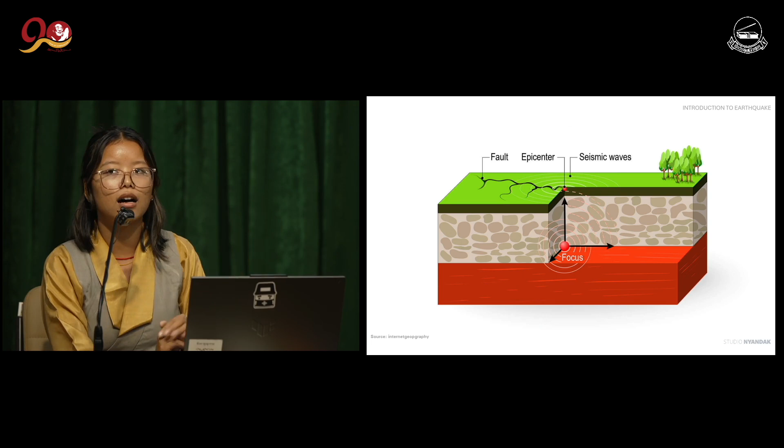These tectonic plates move with each other at different speeds and in different directions. On the diagram, there is a focus point within the Earth's surface, which creates a seismic wave that reaches the Earth's surface, and directly above that point is the epicenter. The focus is where the seismic waves originate.

So just like I said, the tectonic plates move with each other. And when they move with each other, they build up stress and strain. These energies get stored up, and the sudden release of this energy creates seismic waves, which we term earthquake in usual life. Scientists and geological experts use tools like seismographs to scale and measure the seismic waves, and then determine the intensity and magnitude of the earthquake.

Moving forward, there is this Indian plate in the south and Eurasian plate in the north. So what happened was 50 million years ago, there was a collision between the Indian plate and the Eurasian plate. The Indian plate moved northwards to the Eurasian plate, under-thrusting into it, and created this seismic belt, the Himalayan arc. The Himalayan arc, as you see, is this orange line, and it extends from northwest Kashmir to northeast Arunachal Pradesh.

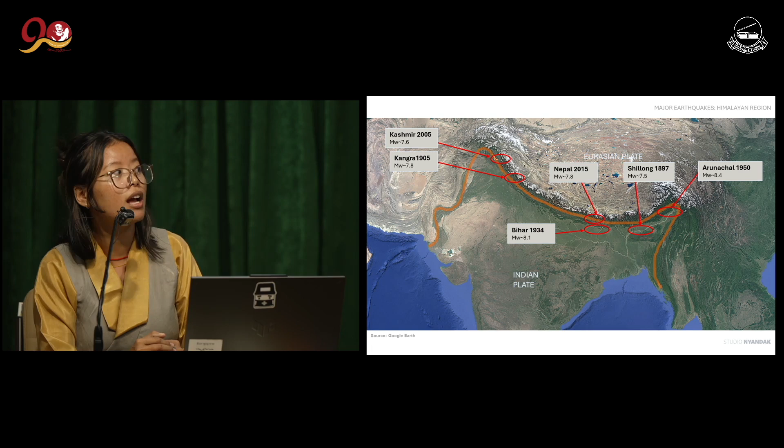This is the earthquake hazard map that shows the seismic zoning as per the Bureau of Indian Standards. It is overlaid with the seismic activities of magnitude more than 5. The circular dots you see are all the seismic activities above magnitude 5. The table on the right upper corner shows the zoning classification according to recorded seismic activity over the years. The Himalaya region, as I mentioned, is the most active region when it comes to seismic activity.

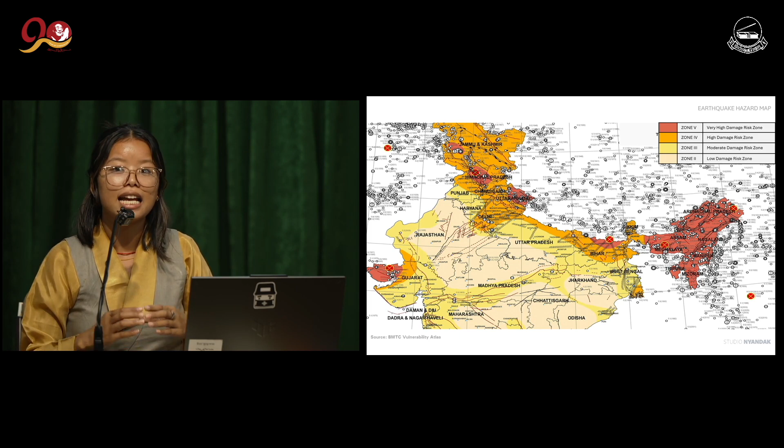Himachal Pradesh, on the northwest side, lies in both zone 4 and zone 5. Around 98% of Kangra district in Himachal Pradesh lies in zone 5. The red color you see on the Himachal Pradesh map is where Kangra lies. Therefore, we need to pay special attention to the buildings, making sure they follow seismic design standards, and assess existing buildings for earthquake resilience so as to be safe.

Focusing on Himachal Pradesh state itself, I will be talking about the major thrusts and the geology of the state. We have the MFT, MBT, main boundary thrust, and MCT. These three are the major thrusts along the length of the Himalayan arc. If you see the color coding, these major thrusts divide the geological zones into 4 parts: Siwalik ranges, Lesser Himalaya, Great Himalaya, and the Tethys domain.

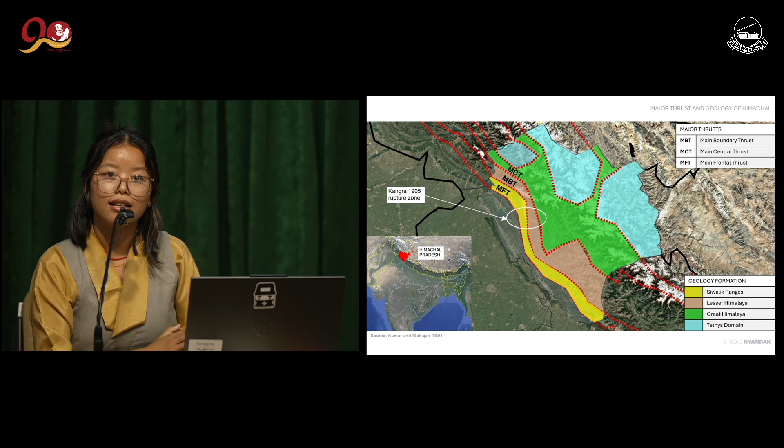The Kangra, Dharamsala area itself lies in the Lesser Himalaya region. This means the Lesser Himalaya region contains Dagshai and Kasauli formations. In simple terms, it contains mudstones and sandstones, and the area primarily consists of alfisols, a sub-mountain soil, layered with shale and siltstone. These soils are rich in clay content, overall suggesting a strong bedrock but weak surface deposits of the area, which additionally factors in amplifying the hazard risks.

Here we have a slide which shows the most severe earthquakes in Himachal Pradesh recorded by the State Disaster Management. The table shows when and where the earthquake happened, along with the magnitudes, and the damages or casualties it resulted in. The first row shows the most devastating earthquake recorded in the 20th century.

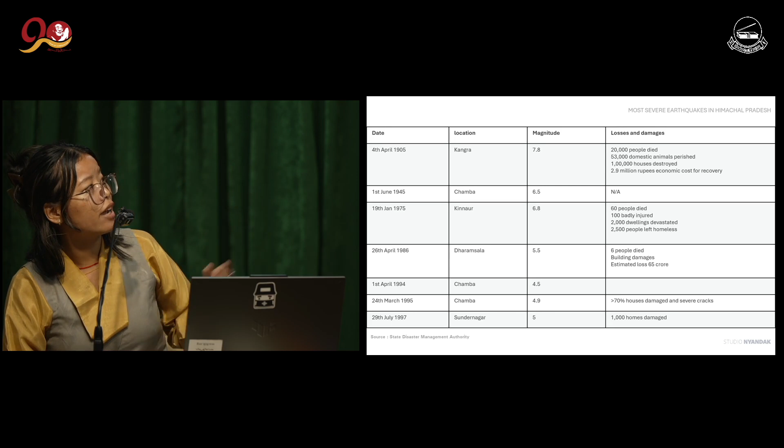1905, 4th April, it occurred in Kangra at 7.8 magnitude, which resulted in around 20,000 people losing their life and more than 1 lakh homes getting destroyed.

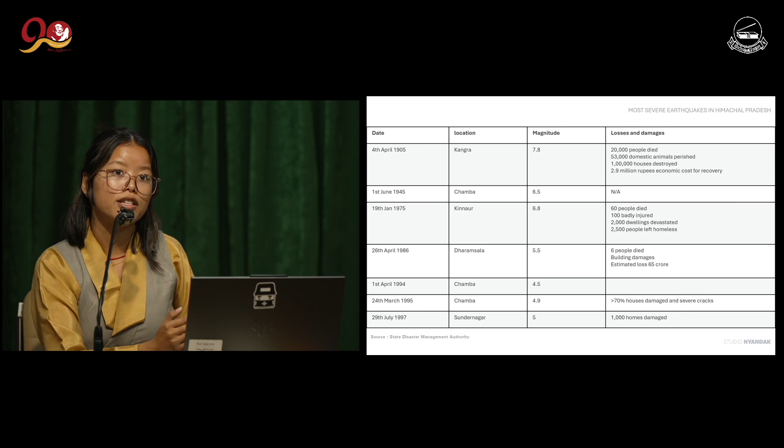And then we have following rows with moderate seismic activities. But if I were to focus more on the Dharamsala area, we have the 1986 earthquake that happened with a magnitude of 5.5. If you see the difference, you can observe that the less magnitude it hits, the less casualties we observe.

These are the pictures taken by C.S. Middlemiss, who came to Dharamsala after the 1905 Kangra hit. While investigating, she took those pictures, and I retrieved those pictures from her investigation book.

On the left side, the old British barracks and the church, the walls are partially collapsed. On the right side, the bazaar and the McLeod Ganj market are totally collapsed. These buildings were mainly built with unburned bricks and mud blocks.

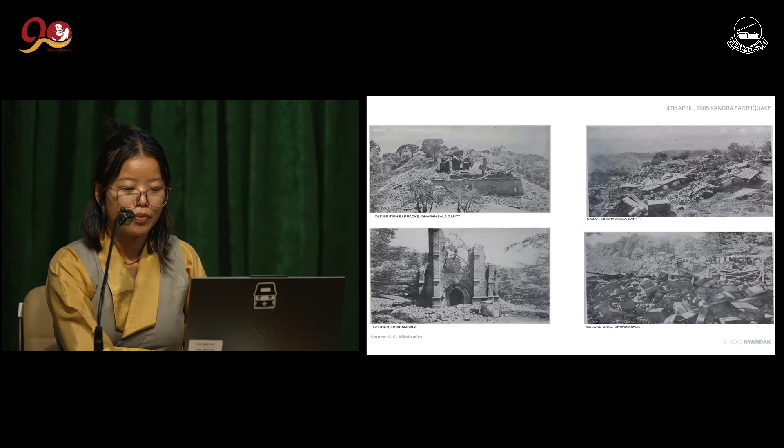We can still find housing similar to those in the Dharamsala area, especially in the village areas, and it makes the people residing there vulnerable to the hazard.

So we have this slide which shows the perspective view of the Dharamsala area. Looking from satellite imagery, Dharamsala is a name given to several settlements located above the Kangra Valley. This area is growing rapidly in terms of population as well as construction, and we all observe how rapid the construction and housing are getting built.

As per the Department of Town and Country Planning, they have recorded a 2011 census of total population around 92,000, and they have estimated a 2035 projection of over 2 lakh people, thus increasing the amplification of hazard with more buildings getting destroyed and more people losing their lives.

Hence, a controlled planning and building construction should be followed according to the seismic standards to reduce the hazard impact.

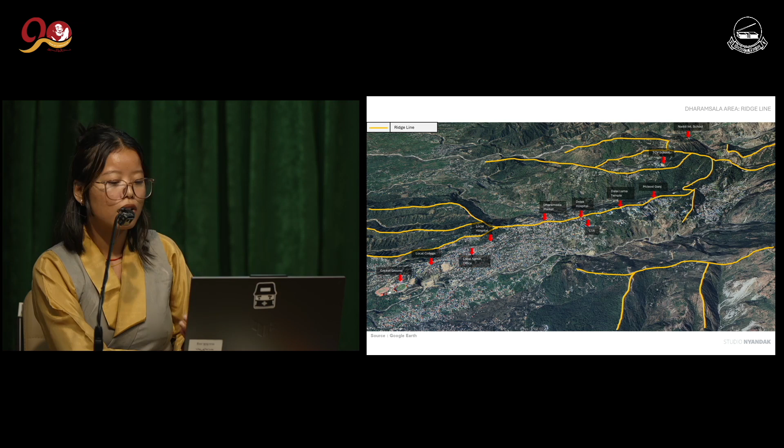Steep slopes are also very prone to landslides, which occur during slope failure in monsoon, and most importantly, post-high intensity earthquake hazard. Thus, construction on the steep slope is not recommended.

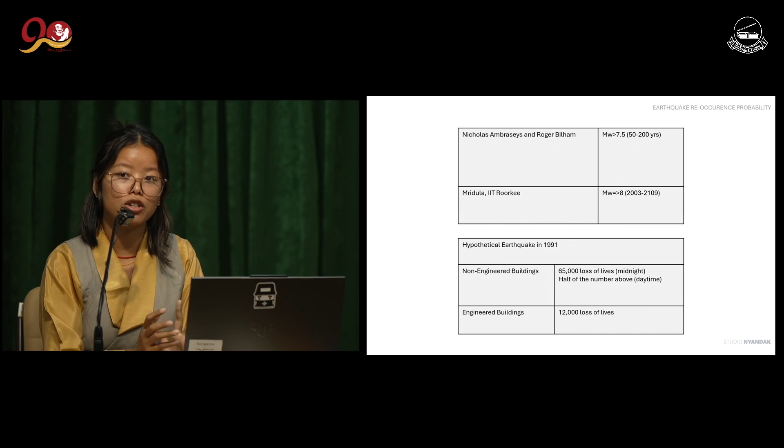Lastly, I would like to conclude my presentation with this slide, which includes the recurrence probability of earthquake in the Dharamsala area. As you can see on the top table, there were geological studies and seismic analysis done by geological experts and researchers. One of them are Nicholas and Roger, who have estimated that more than 7.5 magnitude of earthquake will occur in the time interval of between 50 to 200 years.

We also have Mridula from IIT Roorkee. Her research says that more or equal to 8 magnitude earthquake will happen during the time interval of 2003 to 2109. This shows an earthquake possibility as severe as the 1905 Kangra earthquake in the next 50 to 100 years, approximately. At the bottom, we have the hypothetical earthquake estimation.

This estimation is done by a former national seismic advisor, Professor A.S. Arya.

He estimated that if an earthquake similar to the 1905 Kangra earthquake were to happen in 1991, the casualties for non-engineered buildings, in the scenario when the earthquake hits in winter at midnight, would lead to around 65,000 people losing their lives, and half that number if it occurs in the daytime.

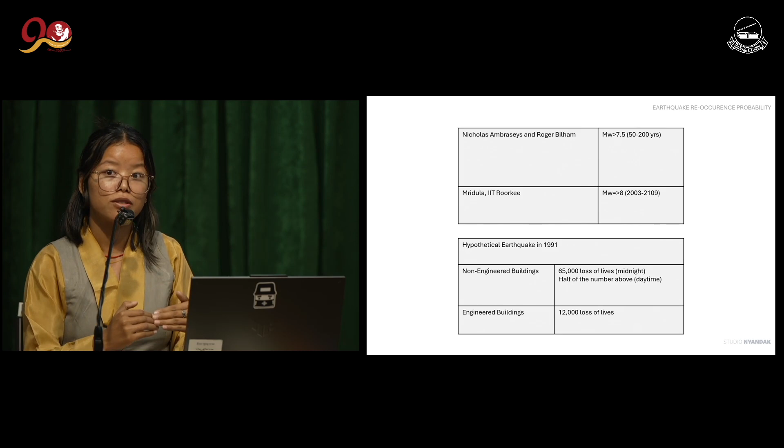But on the other hand, if the buildings are engineered buildings, the casualties and people losing their lives reduces to approximately 12,000. That shows a big difference between engineered buildings and non-engineered buildings.

The question of a Kangra-type earthquake is highly debated because even geologists cannot tell when it will occur. But it is on us to be prepared and aware, and sustainable development should be practiced to avoid the damages they leave behind. So let us be alert.

Thank you, Dechen. We can now explore how rapid visual screening and risk management, integrating them, will help with our community's earthquake preparedness. This is particularly crucial to Dharamsala, our region, given its high seismicity and building vulnerabilities. In my presentation, I will cover risk management strategies, rapid visual screening, and assessment methods.

These two terms on the screen are earthquake hazard and earthquake risk. These two terms are often misunderstood as the same thing, but earthquake hazard and earthquake risk actually have different meanings.

Earthquake hazard talks about the records of earthquakes, data on the geological setting of the region, and the ground shaking models of the region, whereas earthquake risk factors in the earthquake hazard data along with local soil conditions, the area of exposure of the region, and the building weakness of buildings.

To put it in simple terms, earthquake hazard is the prediction of earthquake based on past data, whereas earthquake risk talks about the potential damage of such earthquakes for the region.

Information regarding earthquake hazard is a prerequisite to defining earthquake risk, and that's what Dechen just explained to us all, the earthquake hazard of the Dharamsala region, so we have a better understanding of such earthquakes in this region. Understanding this hazard level is the first step in effective risk management.

Let us now discuss the risk of earthquakes. When an earthquake strikes, there are two major effects: the primary and the secondary effects. The primary effects are those direct effects as a result of the ground shaking, and the secondary effects are the consequences of those primary effects.

If I were to talk about the risk, in the photo you can see the primary risk. Ground shaking is the most common and widespread effect, causing structural damage through seismic waves — damage to buildings, infrastructure, roads, bridges, everything, which makes it harder for rescue operations, recovery, and connection between places.

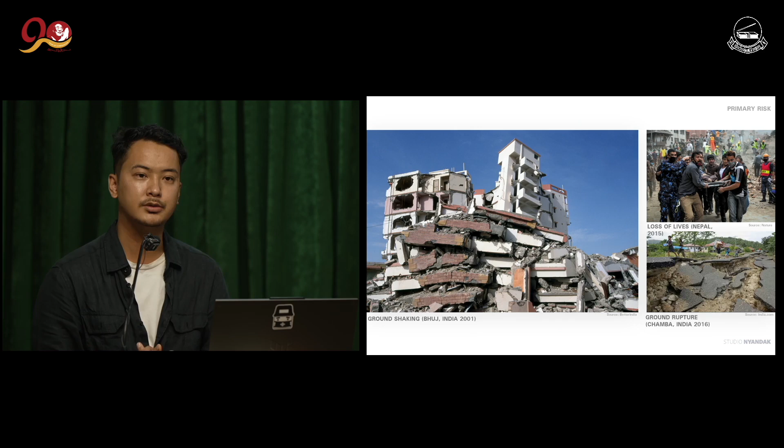What's important out of all the risks is the loss of lives. Buildings, infrastructure, and roads can be repaired, but loss of lives is irreparable, as we all know. There are other primary risks besides these, but they are of lesser concern to the region, such as tsunami and liquefaction, since we're up in the Himalayas, so tsunami is not much of a concern.

So the consequences of the primary risk lead to these secondary effects or risks. So landslides - Dharamsala, as we all know, is in mountainous terrain, so we're particularly vulnerable to earthquake-induced landslides. The photo on the right is of Shimla in 2024. Constructions done without proper geotech survey or engineered design can actually lead to premature landslides, as you can see in the photo.

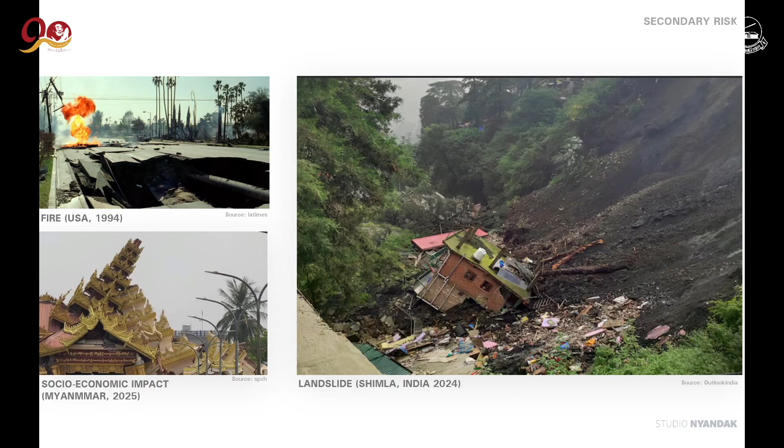And socioeconomic impact - earthquakes disrupt livelihoods, tourism, and local economy, which can lead to displacement, loss of information, and loss of actually cultural, authentic cultural information. For example, the Library of Tibetan Works and Archives that we're currently in has a lot of important Buddhist texts. Back in 2006, as Keshil Haktola mentioned yesterday, Geohazard International, a non-profit working towards global earthquake safety, came and visited the site with a lot of US engineers.

And they recommended that a lot of the books and shelves in the library building were not properly secured, so that could actually lead to the loss of such texts. So if there was an earthquake, even though the building is safe, the books and shelves could fall down and the text could get damaged or lost.

And to talk about fires - secondary fires from earthquakes are actually more devastating than the earthquake itself. The photo on the top left is of the 1994 earthquake in California, US. The fire you can see in the photo is actually from a gas main which caught behind a crater, catching fire and resulting in a lot of houses being burnt in that region.

And flooding is also a risk, which is not shown in the photo. It's quite doubtful in this region because we're up in the mountains, or the hills as we call it. But it could actually lead to flash floods, and rivers could change - the courses of the rivers could change. It could affect smaller regions.

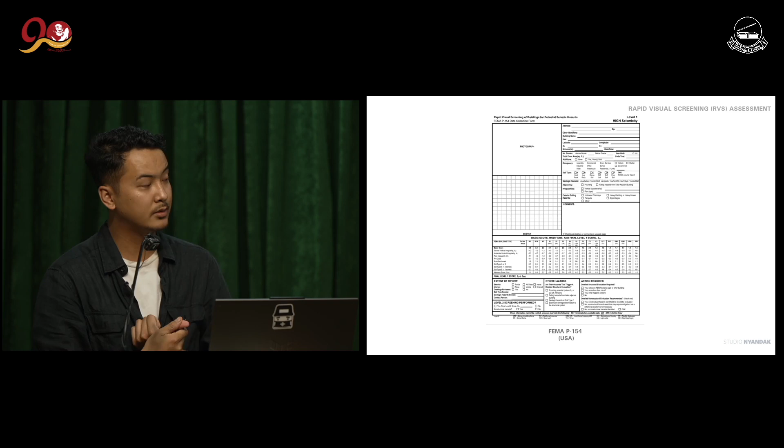And so building construction type is one of the key factors - it's a foundation for vulnerability scoring. And earthquake zones and soil conditions also significantly impact the vulnerability.

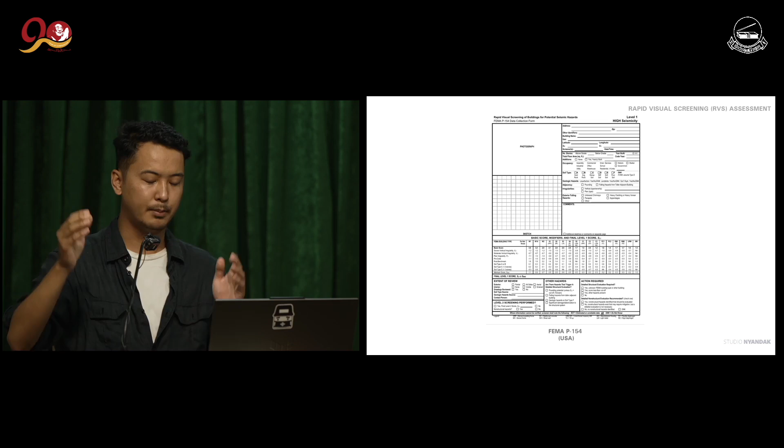If you look in the middle of the screen, where there's a bunch of numbers and tables, the first row is basically the building typology. Based on the building typology, you get a basic score given, whether it's a reinforced concrete or a wooden structure. Then you have score modifiers below, with a bunch of numbers you can see, which are then factored in based on the building parameters. And then an overall score is given.

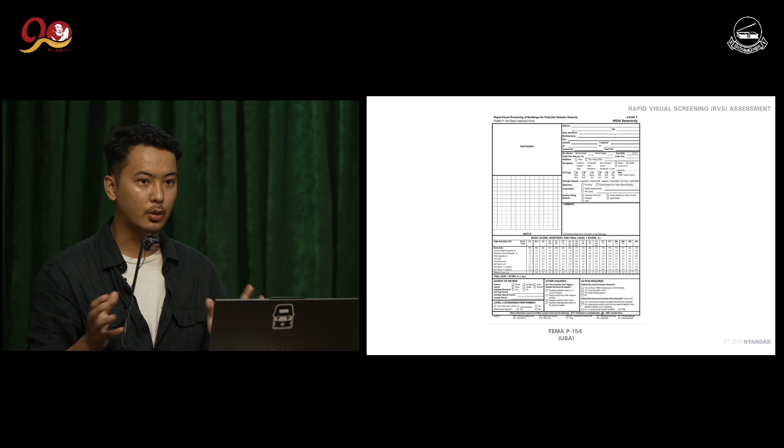And the FEMA P154 form was one of the first forms developed by the US in the 1980s, and the form has evolved into this form. This is, I think, the third iteration of this form.

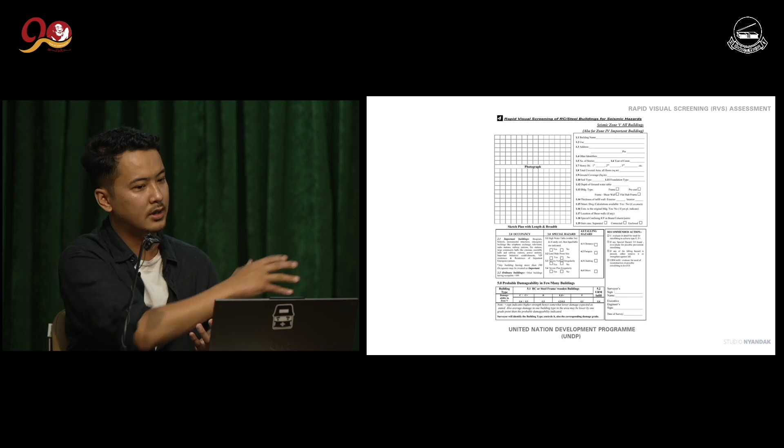And we have other rapid assessment methods in addition to the one developed by FEMA that you just saw earlier. So here are some examples. This one particularly is developed by UNDP, and it's actually developed for developing countries, designed to work with limited technical expertise and resources.

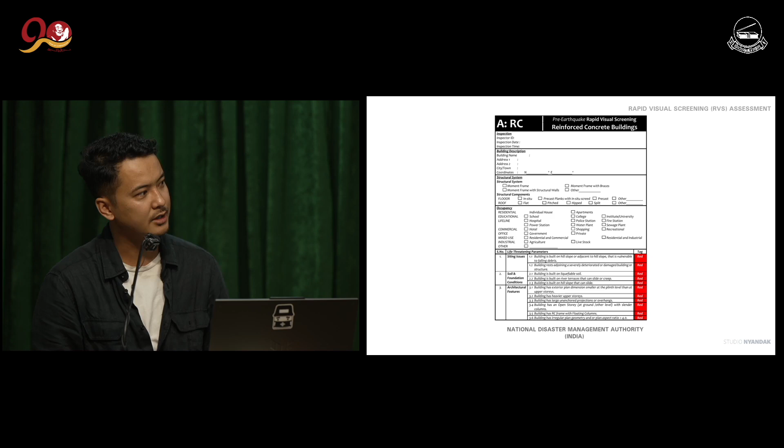So this one is actually developed in India by NDMA, National Disaster Management Authority, and this one has been developed using India-specific guidelines.

So all the forms we saw prior to this, the previous four forms, all have the same purpose in assessing the buildings - rapid visual screening, that's the key purpose. And what they vary in is the grading system - some have scores, some have grading, so that's how it varies, but they all have the same purpose.

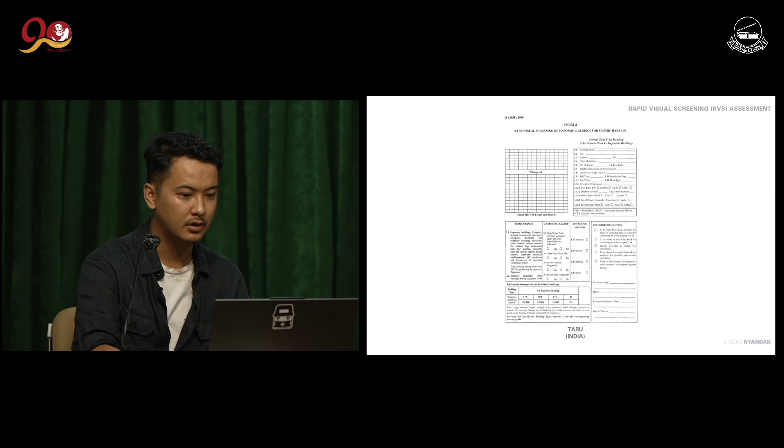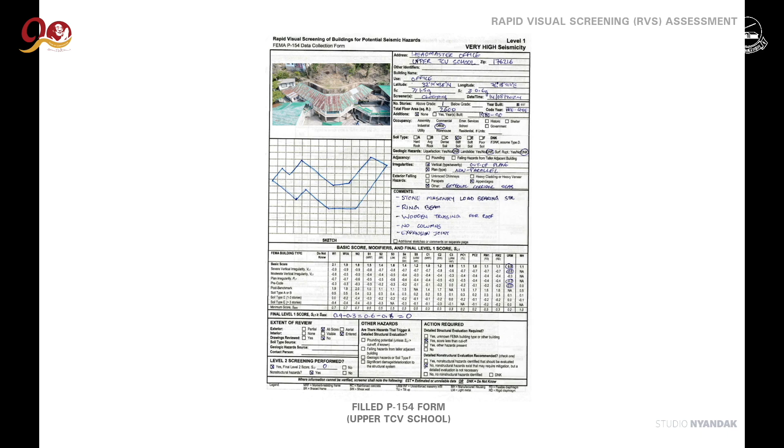Whether it's a plan irregularity or vertical. And then the scoring system, as you can see on the table with the numbers, small boxes, small circles - that's the scoring system with the score modifiers, and then an overall score of 0 is given, right? So that's actually below the cutoff, which deems the building quite unsafe.

So ultimately, this RVS method forms the basis for prioritizing whether a building should be retrofitted, replaced, or rebuilt, based on the building parameters, right?

Okay, all right, so upper TCV case study. This is a case study we did for RVS.

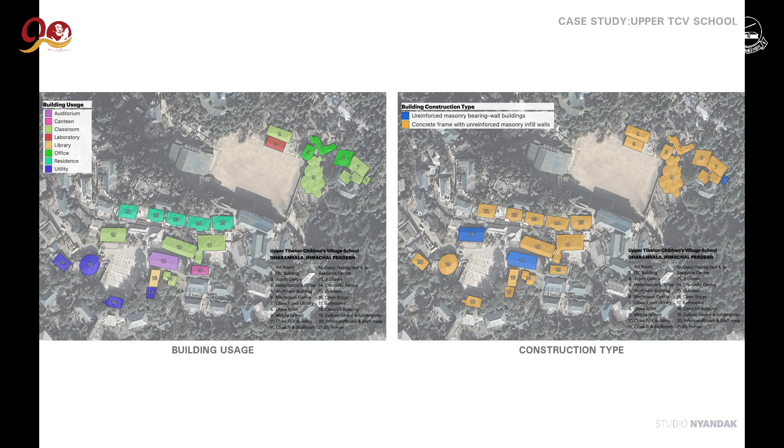As a continuation of one of our projects as part of Studio Nyandak, the rest of the team were able to conduct RVS on various building blocks of TCV, as you can see on the color-coded map. This research work, aided by Tibet Fund's grant, our team visited TCV school and conducted RVS on all the various building blocks, and converted the data into an Excel spreadsheet.

all members of TCV. And I'm pretty sure most of us would know, the motto of the school is come, come to learn, go to serve. So we all feel pretty grateful that we were able to contribute to the school in this manner.

And so I'll talk a bit about Upper TCV school. This is just a small region of Upper TCV. The Upper TCV school actually covers an area of about 40 to 43 acres roughly. And the school houses about 1,200 students and staff, and comprises various buildings, from classrooms to boarding houses,

to residential units, to offices and auditoriums, and everything. And the school is actually located on a ridgeline, and the majority of the building blocks are built onto a sloped terrain. So the two photo maps that you see on the screen are of building usage and construction type.

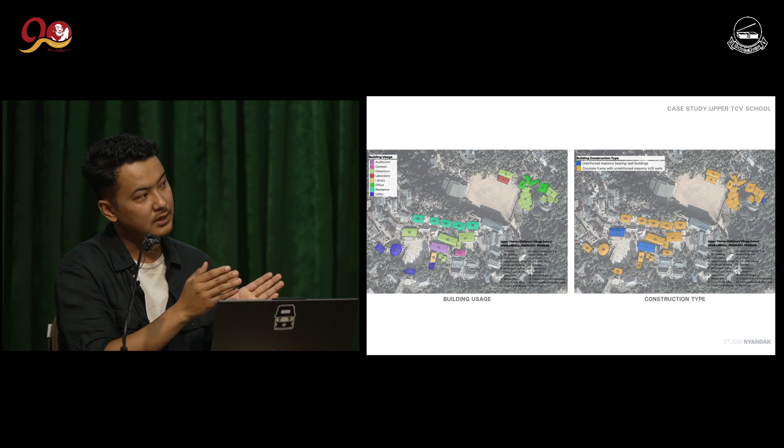And in construction type - TCV, even though it was built in the 60s, as time progressed, even the construction typology also changed. So in TCV, the blue ones are actually unreinforced masonry load-bearing structures.

TCV primarily has reinforced concrete structures, but what's interesting is that most of the reinforced concrete structures in TCV predate seismic codes, or they were built by local masons. So they didn't really have an engineered design to it, right?

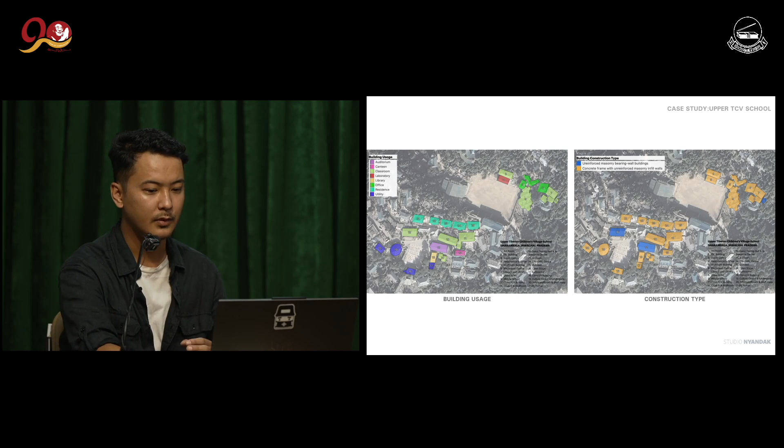Those buildings that have an asymmetric layout - buildings that have a plan irregularity react differently to an earthquake. This is mainly because of the

ratio between the length and width - the x to y, when you think about it - because the shape of the building, if it's narrow, reacts differently to earthquakes. So the allowable ratio for length to width is ideally kept to 1:2 or 1:3. So mainly if it's 10, it can be 20 or 30. But if it goes more than that, it becomes too narrow and becomes problematic for the building when it reacts to an earthquake, right?

Depending on when you build a building, it should ideally be built in plane, with each floor stacked on top of each other. It should not be out of plan, where one floor juts out too much, and shouldn't have split levels. Given the terrain constraints, most of the TCV building blocks were actually built on split, slopey terrain, so if a building is here, the floor above goes further back. That's also problematic in a way.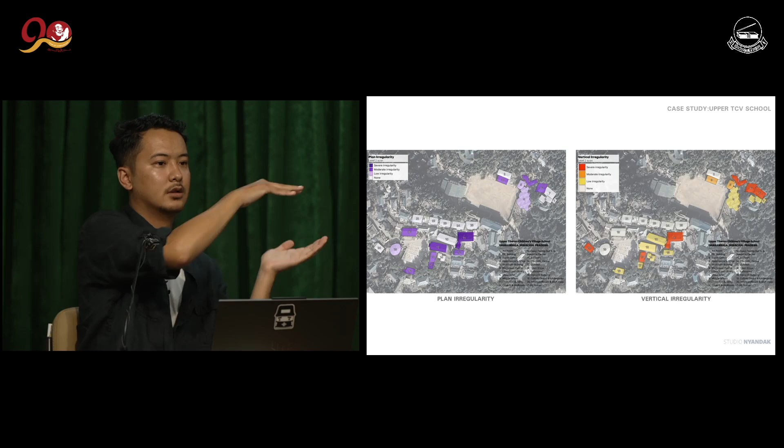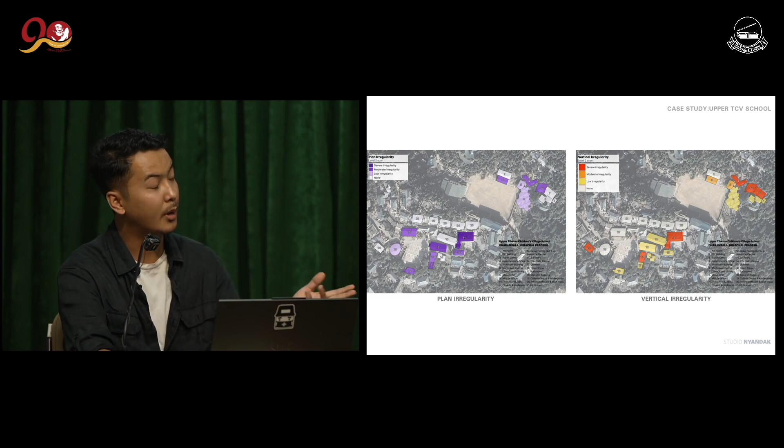One good example of vertical irregularity we have is the library annex halls extension block. If you look at the building from the side, there's actually a vertical offset. So during an earthquake, the building may move in an undesirable way, which may result in twisting because of that vertical offset. Both these irregularities significantly impact the vulnerability of the buildings to earthquakes, and this is somewhat due to the terrain constraints and site limitations we have.

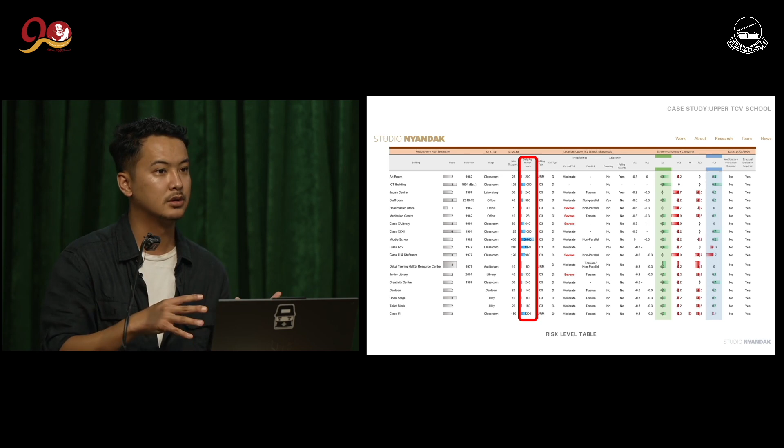This is the Excel spreadsheet we were able to make from the RVS screening, from our website. Something special we did in addition to the RVS was to factor in human hours. The red box on the screen shows the amount of human hours spent in each individual building. When Yumso and I were in TCV, we calculated the human hours spent in each building block relative to other building blocks.

What we found was that the classroom buildings and the homes actually had more human hours. As you can see, the ones with higher blue levels, that's how this helped us prioritize which buildings were more important in terms of human hours.

This RVS method we just talked about is a way to mitigate seismic risk, but there are other strategies we can use too. As Dechen explained, Dharamsala falls in a very seismically intensive zone, and it's not a matter of if, but rather when a heavy earthquake might occur. So it's upon us to be responsible and prepared.

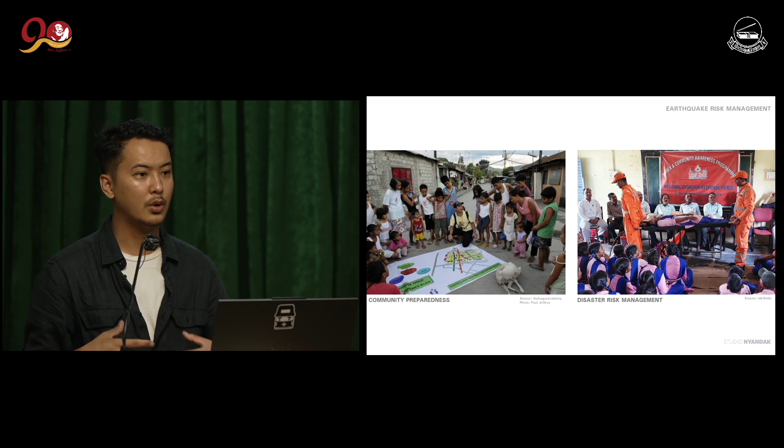These are two different but closely related terms. For community preparedness, the key lies in community participation from everyone involved, whether businesses, individuals, or residents—everyone has to be personally involved and participate. As shown in the photo, they're discussing evacuation procedures in the event of an earthquake or fire. Everyone should be well informed about where to go, the assembly points, and the clear routes. For example, if there's an unstabilized wall or retaining wall in a residential area, people should be aware and informed to stay clear of such areas. This is part of community preparedness.

What's also interesting in community preparedness and disaster risk management is policy integration. Incorporating seismic safety into local building standards and codes could potentially save our future by building safer houses when constructed with seismic codes.

For disaster risk management, we can have awareness campaigns as shown in the photo, early warning systems set up at different locations around town, emergency response ready to go when needed, and resource mobilization to keep resources available at vantage points. We can also have recovery planning with guidelines already set up beforehand, so we're better able to handle the situation if an earthquake does occur.

So that was about what we as a community can do to stay prepared for an earthquake. But in terms of the buildings that we live in, there are different ways to strengthen our buildings and to reduce the damage from the results of an earthquake.

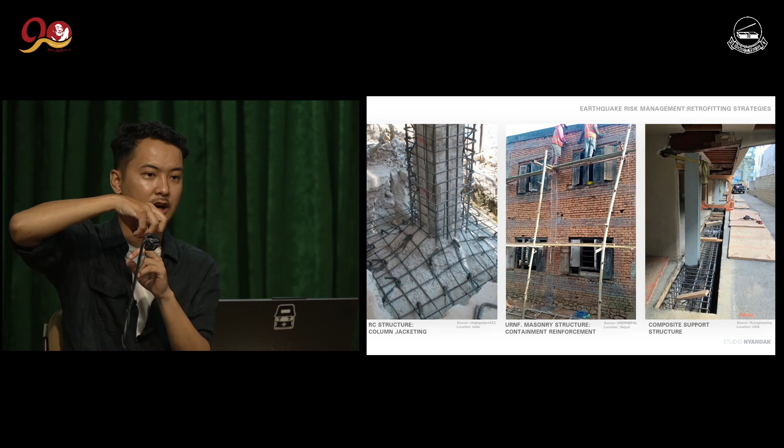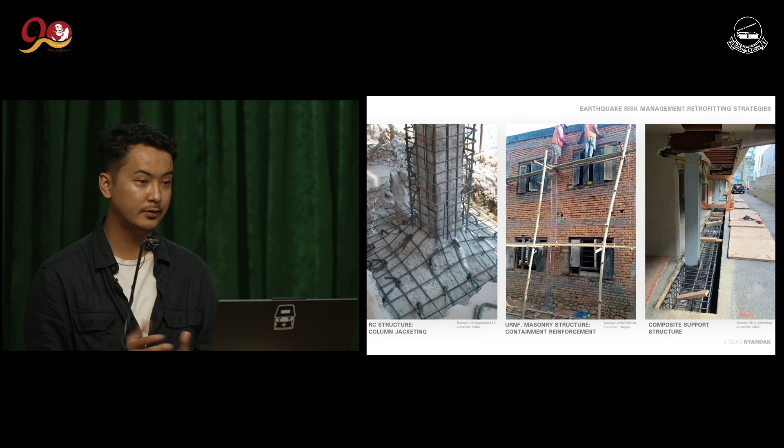And also we as a firm encourage retrofitting instead of rebuilding, as Keshila suggested, because there's less environmental impact and it's cost saving. As an architect in the US once said, the greenest building is one that's already been built. So it's better to retrofit than to rebuild if it doesn't need rebuilding, right?

To end my presentation, I'd like to give you some key takeaways from what Detso, Dechinla, and I discussed. Dharamsala is high seismic risk, falling in seismic zone 4 and 5 of Indian code, which requires proactive measures in terms of building infrastructure and vulnerable infrastructure. Majority of the building blocks around Dharamsala predate seismic codes, so most buildings are built without proper engineering, which is very vulnerable to earthquakes.

And tourism dependency - the name itself is self-explanatory, since Dharamsala has a lot of tourists coming every year. So economic resilience depends on maintaining safer and functional infrastructure and community preparedness. As I mentioned earlier, we as a community all need to be involved to be better prepared for such events.

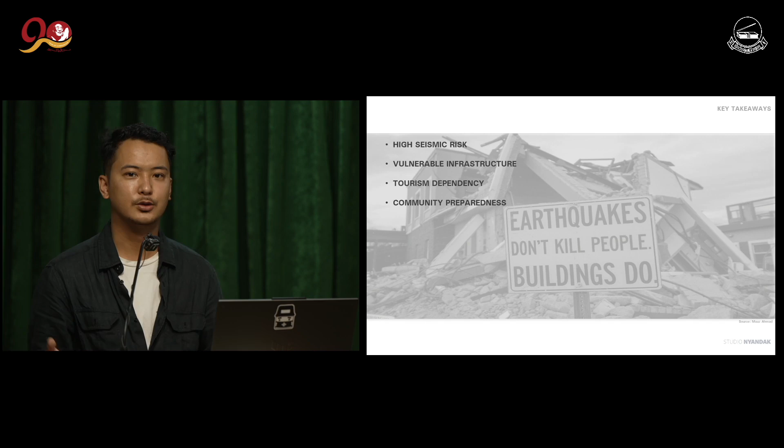Before I end this slide, I'd like to reiterate the photo as you can all see on the slide: earthquakes don't kill people, buildings do. So it's upon us to be better prepared and to be aware of such situations. Thank you.

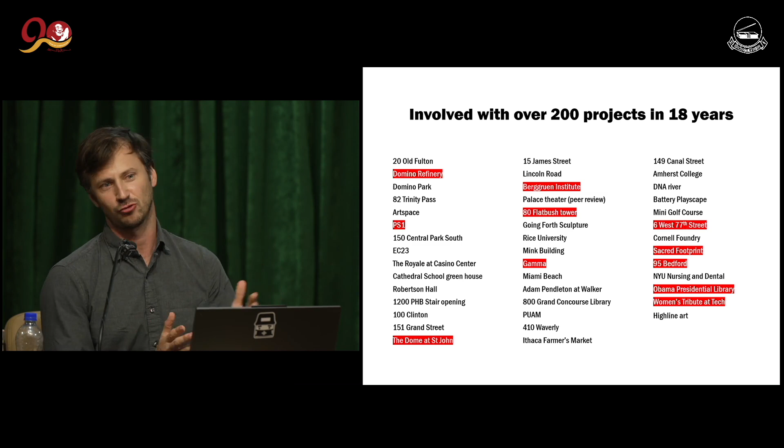I really wanted to be an architect growing up, but I really enjoyed sciences and math especially, and so that naturally pulled me towards engineering. And I'm really thankful I got there. It allowed me to work on many more projects than I would have if I had been an architect.

Over the last 18 years, I got really lucky to work on a lot of projects at very different scales and with a lot of different materials, which is very rewarding as an engineer because you're always challenged with new things. I've worked on rammed earth buildings, bamboo structures, steel. Today we'll talk about concrete mostly, but if you have questions about other materials, feel free to jump in.

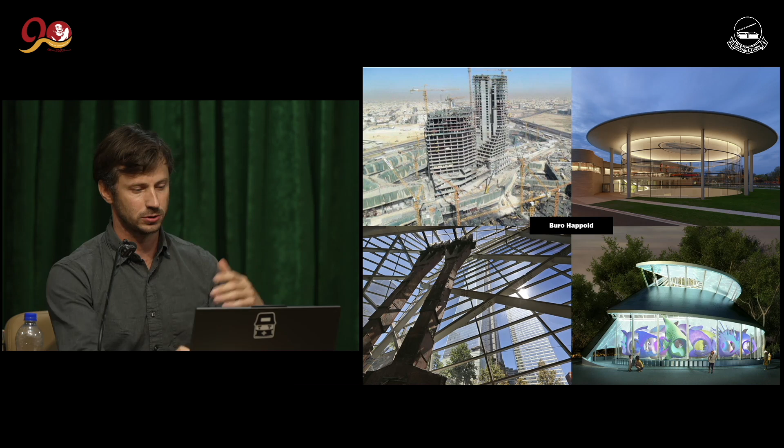A couple pictures of past projects. I'm not going to go too deep into this, but on the far top left, you see a tall concrete tower in the Middle East, which was early in my career. Not seismic, but wind controlled. Bottom left is a steel building with complex geometry.

So we'll start with a bit of a refresher on structural engineering. Then we'll expand a little bit on how seismic loads actually work. We had a great introduction on seismic risk. And then we'll dive into concrete. And then finally, we'll explore a little bit what all of that means specifically for Dharamsala and how things are built locally.

So how do buildings work? We all know what buildings are for. We are in a building right now. We don't want rain on us. We want the weather to be sheltered from our lives. How does that work? How do buildings stand up?

In this little diagram, we see there's a lot of environmental things that can affect a building. The bottom line is that something like rain has a mass, a weight that will have an impact on the roof panels. These roof panels will in turn load the roof trusses. In turn, those will load the walls and so on and so forth until the foundation, which is where the load escapes the building.

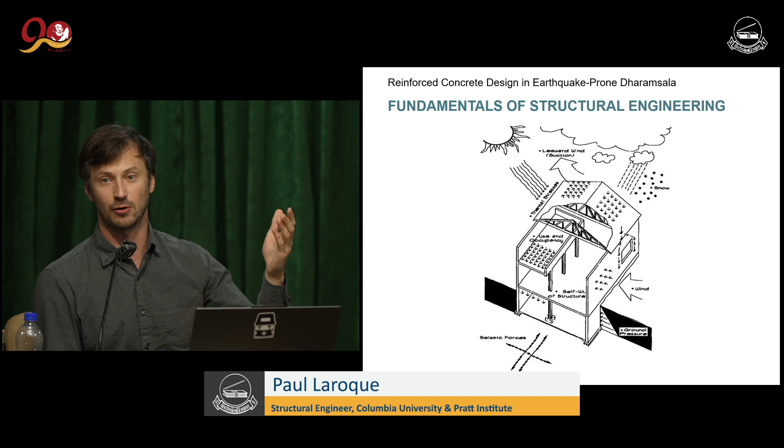And what happens, we think that the weight of the rain is no longer an issue for our building. That load path, this chain of events that I just described, is critical to the structural integrity of the building. And that's the role of the structural engineer, to understand that all of the elements involved with the load path and the connections between these elements are structurally sound, so there's no weak link in that load path.

Obviously, rain is very lightweight and rarely a problem, but that's the same logic for any loads that may or may not impact the building throughout its life. One of the key efforts is to understand what loads are actually going to impact the building, and that's a bit of a game of guessing or predicting the future to understand what could happen.

So we organize these in two main categories. We've got vertical loads that are going to be gravity governed. And then we have lateral loads, which is where our big topic of the day, seismic, is going to occur.

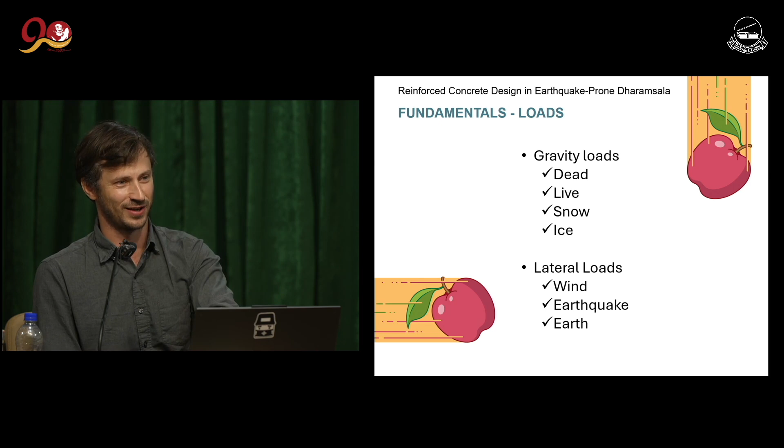Comparatively, if you walk in a room, the building can handle that pretty easily because proportionally your weight is very small compared to the weight of the building. Your weight is part of the live load category, which is any load in the building that can change over time. Structural engineers will design for specific amounts of people in specific rooms.

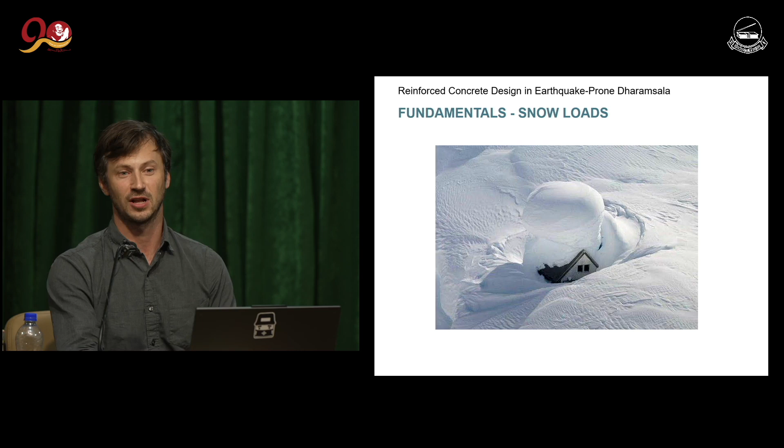Lateral loads are a very different animal. A very common one is wind. This is the Eiffel Tower in Paris, which you may be familiar with. This building was built as a temporary structure, and 100% of the design was about wind resistance. It was the tallest structure at the time, and we can learn a lot from just looking at that.

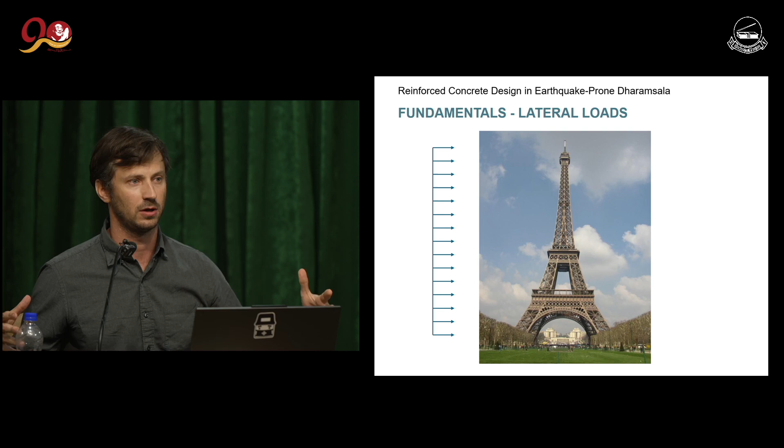We want the building to be as narrow as possible. At the top, this is where the wind is the strongest, so we minimize the pressure or impact of the wind up there. We put holes inside the structure, in the arch and between all the structural elements of the trusses, which allows wind to flow through and minimizes its impact. Finally, we have a really wide base, which gives us stability, very important for lateral forces.

If we take a little example here, just to recap, this truck, just like a building, is seeing a lot of live load. All of these rice bags on the back are loading the truck, loading the deck of the truck. That load gets carried through the axle, the wheels, the tires, and all of that gets dumped onto the street, where the foundations of the truck are located. The truck is also loaded by wind pressures when driving on the street, or if there's side wind, and that would contribute to a different load path.

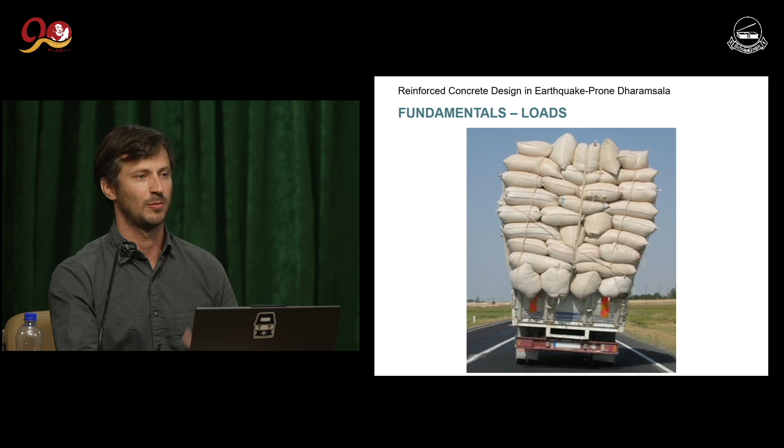If we were to add one more bag, it's possible the truck would not survive, and let's say the axle would break. That's where design really takes place, understanding the size of this axle and the material it's made of. Maybe we could use a stronger material, which is a whole other aspect of the profession. So loads is one thing, and material science is another.

We want to make sure that the elements inside our buildings are made with the right materials and have the right strength. There's lots of properties there.

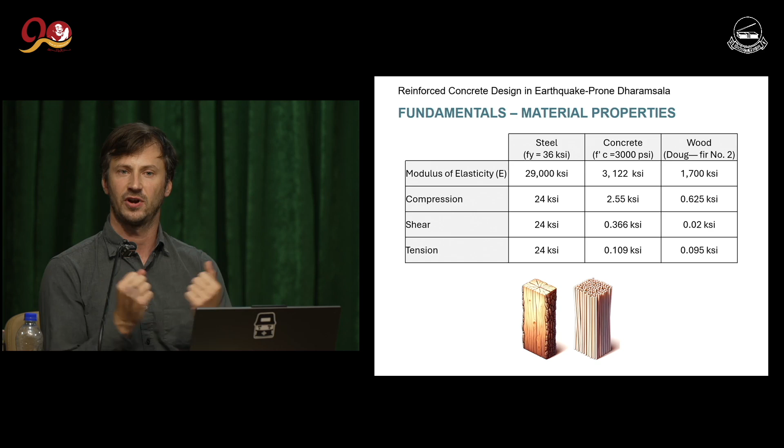Materials can be very simple to use, like steel, which engineers like a lot because it's just as strong in compression, tension, and shear. Other materials are a lot more complex, and each is pretty unique. Wood and concrete, for instance, will behave differently depending on how you pull or push at them. Concrete is very weak in tension, but very good in compression.

One thing I'm going to try to introduce today is the concept of ductile materials. Each material has a bit of a fingerprint, if you will, that engineers represent as a stress-strain diagram, which is a relationship between how much load we can put on a piece of material and how much that material is going to deform.

Why is it so important that a material becomes ductile? Because it allows it to release energy without breaking. In an earthquake event, we want things to deform and move without sudden failure, and that's what steel can do. Concrete does not do that, which is why, when we talk about reinforced concrete, the reinforcement is the key player in the equation.

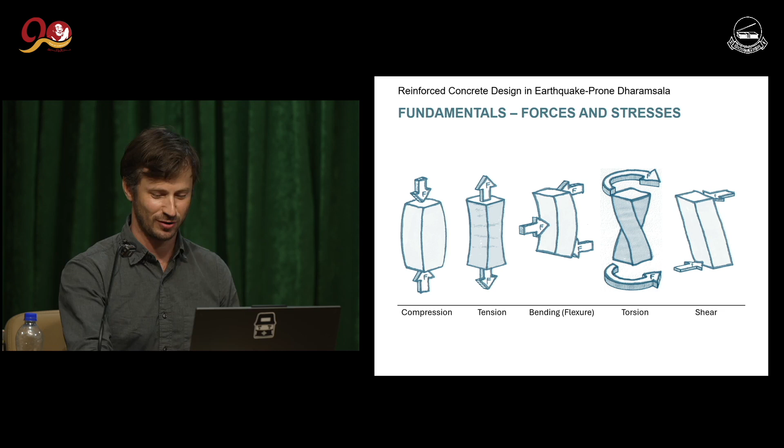So we talked briefly about materials reacting differently in different directions. Structural engineers fundamentally think in five different forces and stresses: compression, tension, bending, torsion, and shear. I'm not going to go too deep into these, but I'm happy to introduce more if you're interested. We'll talk a bit more about compression and bending because they're relevant to reinforced concrete.

This is just a classic example. We all know about compression. I have a bottle; if I push on it at both ends, that bottle is feeling compression, and if I push hard enough, it will fail. That would be a compressive failure. I could make the bottle wider or stronger, or if it was full it would become stronger and take more load to crush it.

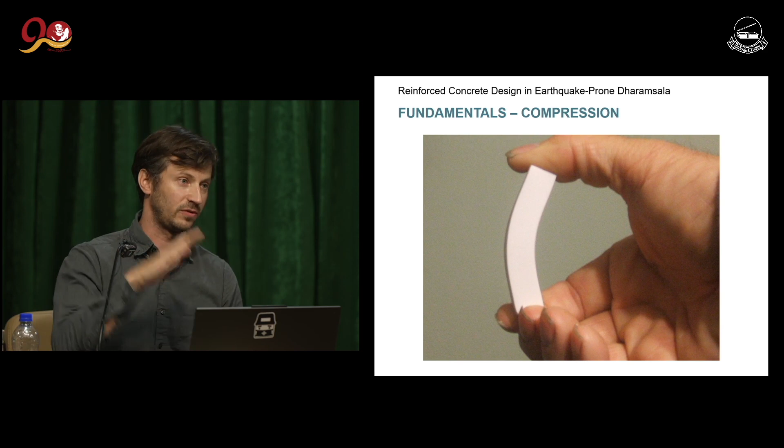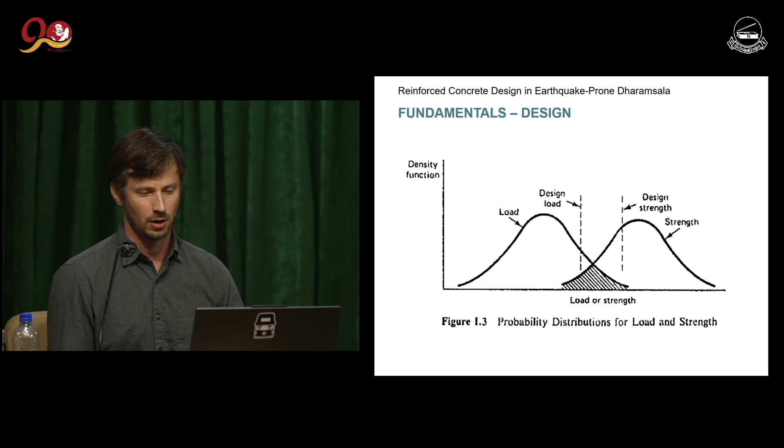Once we have these forces, it can be quite a complex exercise to take all the loads on our buildings down into the structural elements. We essentially want to confirm that the design load is going to be smaller than what the material is able to take, which we typically quantify as stress — or here, load versus strength. In this diagram these are expressed as probability or bell curves, because loads are never perfectly known and material strength is never perfectly known. We like to think of a piece of wood as always being the same strength, but every element is slightly unique, so we work with safety factors to help mitigate these issues.

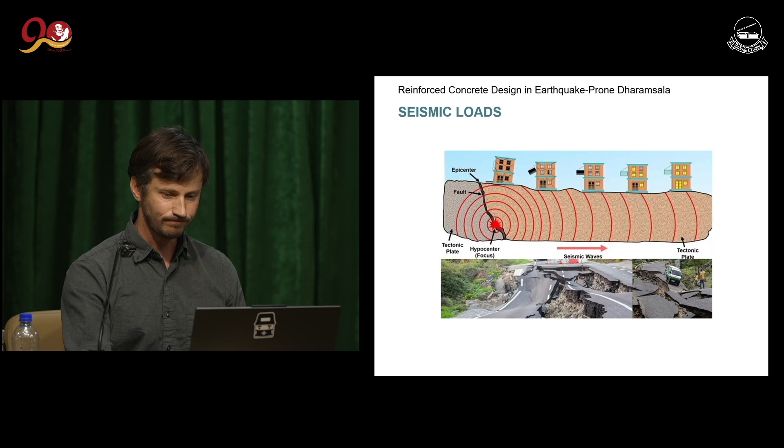They travel in all sorts of directions in the ground from the epicenter. And we saw earlier that the closer you are to the epicenter, usually the worse it is in terms of energy transfer. Obviously, when an earthquake happens, there's tremendous amounts of energy, especially compared to the scale of a building or a human. But what's also interesting to highlight is that the geology of the ground will also affect how these energy waves will travel. So you might be pretty far from the earthquake and still see a lot of energy from it because the ground structure is really good at transmitting energy, or you could be in another spot where the ground is really good at dissipating energy closer to the earthquake epicenter.

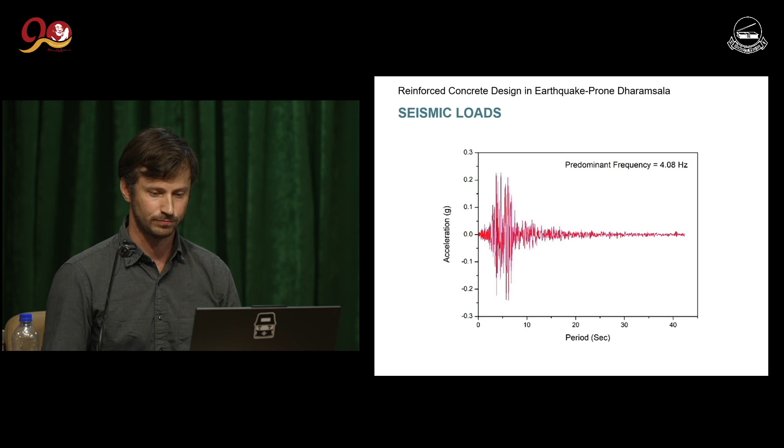And we'll see that that matters quite a bit, because the building, we talked about the earth moving, but the building is sitting on the earth. How does that really affect the building?

Really, what we talk about when we talk about seismic loads, we talk about inertia. And the heavier the building, the more inertia it has. And that inertia is the relative movement of the building with respect to the ground. So the ground is moving, and then the building is like, oh, the ground is moving, I need to move now. And by the time the top of the building realizes the ground has moved, it's trying to catch up. There is a differential between how the ground is moving and how the building is moving, and that differential of movement is what's generating loads inside the building. The stiffness of the building will matter a lot as to how much of that discrepancy there is between the ground and the top of the building.

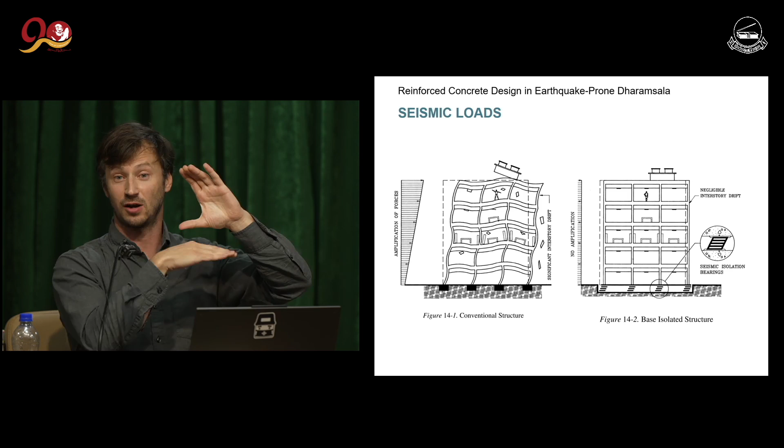So in an ideal world, we could isolate our buildings from the ground, and this is actually a technique called base isolation. This was theoretical for a long time, but we've implemented this in a number of buildings in California and Japan, where we put our buildings on wheels. And if the earthquake moves, the ground is moving a lot, but then the building doesn't really care because it's just on its wheels and the wheels are spinning. So in this idea, the building is not seeing any earthquake loads.

So a little video that I think is really helpful to understand the complexity of this topic and how the frequency of the ground shake may or may not affect your buildings depending on the stiffness of the building itself. This is something that we call natural frequency. Each building has its signature natural frequency, the same way that you have a natural frequency as a pendulum.

So if you're a little kid on a swing and you push a little kid on a swing, you don't need a lot of energy, right? You just need to time very well when you push the kid. You can push a very little and just time it just right. And if you push your child at the exact right moment, you can send your child all the way around the swing.

That is what happens when you hit the exact frequency of that system, like the child on the swing. Here we see a shake table, and we're shaking the table at very specific frequencies. Depending on the natural frequency of the sample—we have three buildings represented here—only one of the samples is affected by the given frequency of the shake table.

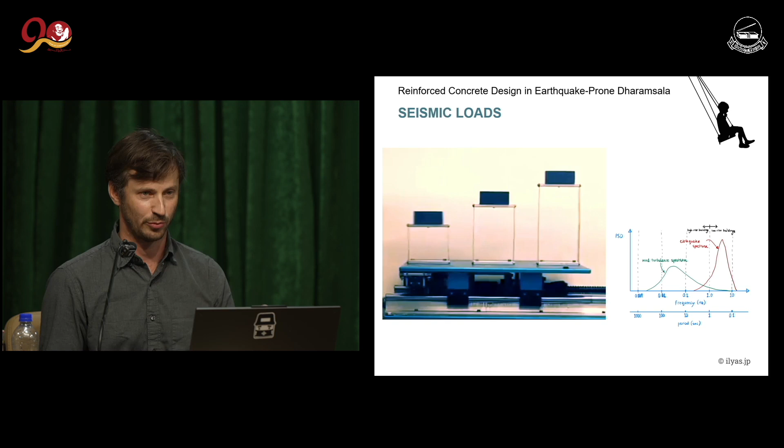The way the world works, taller buildings will be much softer and controlled by wind. Shorter buildings will have much higher frequencies and be much more sensitive to earthquakes, which is very unfortunate for us because we build lower rise buildings and we live in a seismic zone.

To summarize our seismic loads: it's about ground motion, and we can do very little to control that—it's just a given. What we can control is the mass of the structure; the heavier the building, the worse it performs in a seismic event. We can also control the stiffness—if it's a softer building that moves more easily, it will attract less seismic load.

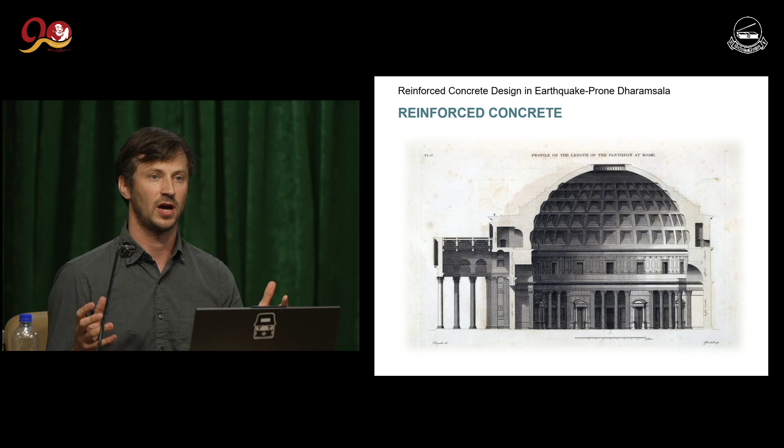Now let's talk a little bit about concrete. Concrete, you probably know, was invented by the Romans a long time ago. The Romans disappeared, but they left us one of my favorite buildings in the world, the Pantheon. The technology was gone for a long time until it was discovered again 1800 years later. Basically, it's a liquid stone that solidifies after it's set and strengthens over time.

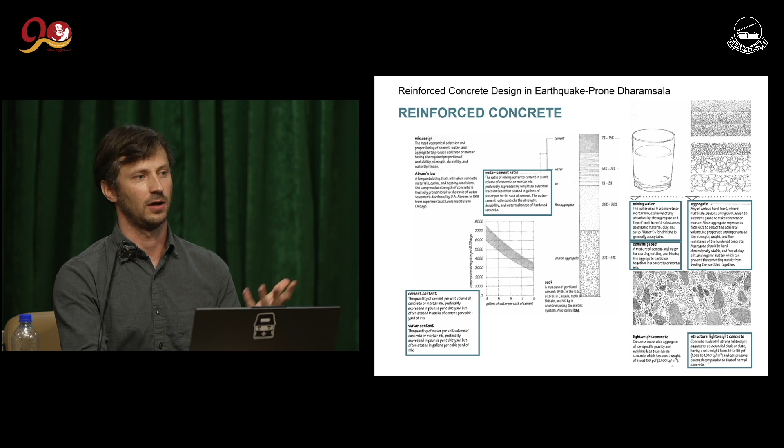The magical ingredient in concrete is Portland cement. The Romans were using pozzolan, which came from a volcano; Portland cement is just a man-made version of that. To make concrete, you mix water, cement, aggregate, and sand, and you get a cake batter that will harden over time. Depending on how much cement and water you put in the mix, you'll get different strength.

This is a bit of a hot topic in the region: quality control of the actual concrete. A lot of people say concrete mixing is more of an art than a science, and compare it to baking—you really need to follow the recipe. But the bottom line is that contractors will often cut corners, and you'll end up with concrete that's weaker than it should be, which is obviously bad.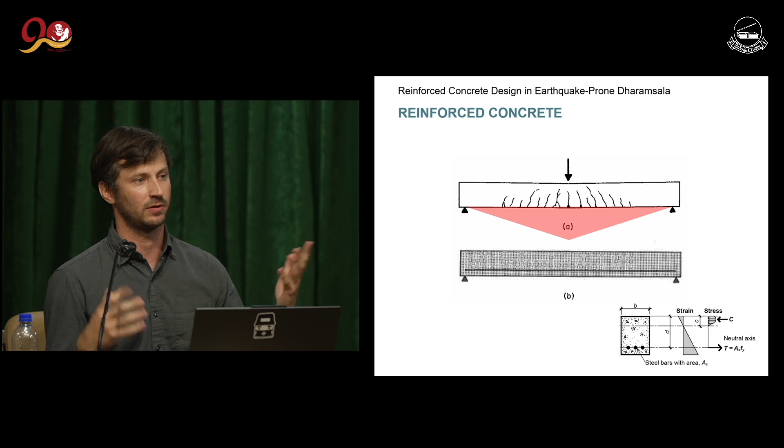That's the whole magic of reinforced concrete: to prevent these cracks from opening. We provide steel inside the concrete, keeping the cracks closed and allowing the system to resist the load. The beauty of this approach, invented by a Frenchman, is that the concrete protects the reinforcement from fire and water, which the reinforcement is very sensitive to, while the reinforcement helps the concrete survive these loads. It's a very symbiotic relationship.

Here we have examples of reinforcement in the field before the concrete is poured. If you walk around, you see a lot of reinforcement sticking out of walls and columns at construction sites. But generally speaking, once built, we don't really see the reinforcement, and that can be a big challenge with concrete construction—we don't really know what was installed.

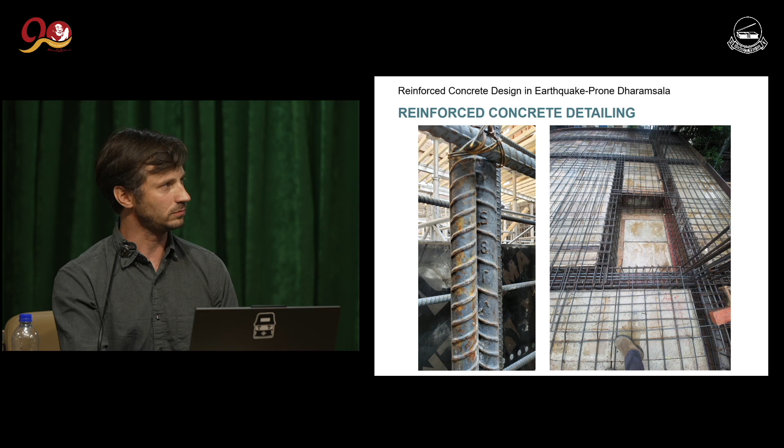There are some very sad, unfortunate stories of contractors installing reinforcement, having someone inspect and confirm everything is right, and then taking the reinforcement away before pouring concrete to save money, because steel reinforcement can be quite expensive. That inspection stage, where you check reinforcement is in the right place, is a key aspect of reinforced concrete construction.

Concrete detailing—I'm going to talk about that a little bit. I'll try not to be too technical, but it's really at the heart of good reinforced concrete practices.

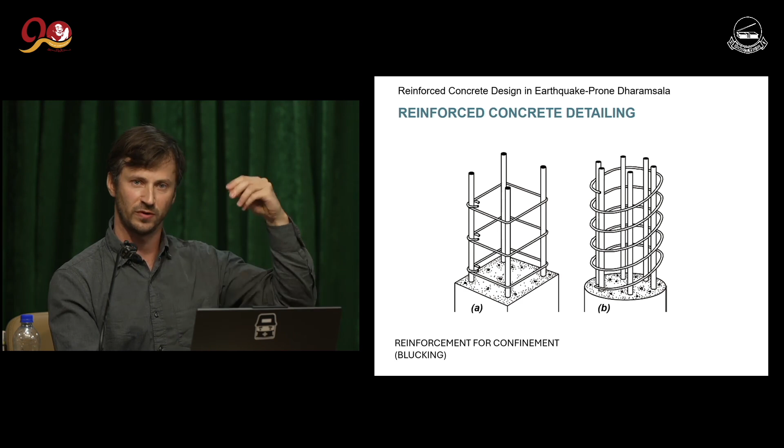And it's a very misunderstood aspect of the work. There's lots of kinds of rebar, which is the name we give to reinforcement, or steel bars inside concrete. Here we see rebars that are specifically implemented to resist shear loads. Shear is when things try to break along vertical or horizontal lines. In columns, we'll also have very specific patterns for reinforcement to resist compression loads or buckling loads.

The rebar is obviously a really key aspect of the whole process. We want to make sure the tension can travel from rebar to rebar throughout the structure, and that can be quite tricky. That happens through the texture of the rebar and its contact with the concrete. Lap splice is the key thing to remember here: you're not going to have rebar that's infinitely long, so you always need to splice things and have an overlap that allows the tension to travel from one end to the other.

The larger the force, or the larger the rebar, the longer your lap splice needs to be. Sometimes these lengths need to be quite significant, which is a big issue for contractors because they don't necessarily calculate the cost of this lap splice, which is twice the reinforcement.

Anchoring into concrete is also a big issue, making sure that your rebars are properly set inside, so when you pull on them, they don't come out.

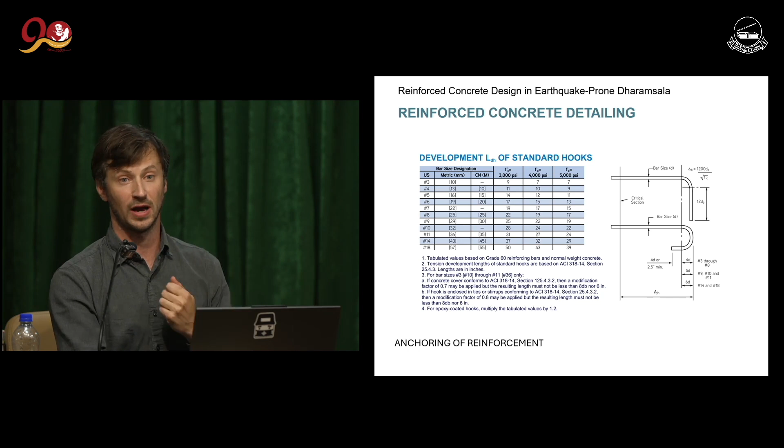And it's essentially like feet, right? Our feet allow us to spread our weight onto the ground. If we walk on snow in the winter, we want rackets to distribute our weight so we don't sink into the snow. The more load we have, the more we want our footings to be large.

These columns are the only structural element that connects the building to the ground. So we know that the lateral forces have to travel through there.

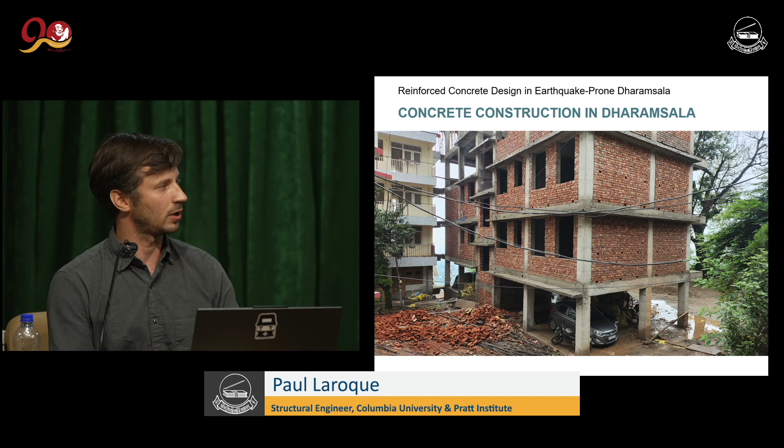This is a very typical vernacular here. We have our concrete frame. We see the columns, we see the beams, we see the slabs, with these slight overhangs, which are very simple to achieve. And then we see our panel infill, which is brick typically, which is very affordable and is typically considered non-structural, though obviously the weight of that facade is very significant.

So how do these columns and beams resist the lateral forces? This is what we call a moment frame. And if you had a bunch of sticks and tried to build a little frame, which I'm sure you've done as a child playing around, you would know that this would instantly fall down because it's not stable.

The one way to create stiffness is to reinforce these joints, and that's what the moment frame is about. It's going to carry this lateral force through moments, which is something we talked about a little bit, and those moments are what allow this system to be stable. The key here is that we have a lot of extra forces in the beams and the columns just from that lateral force.

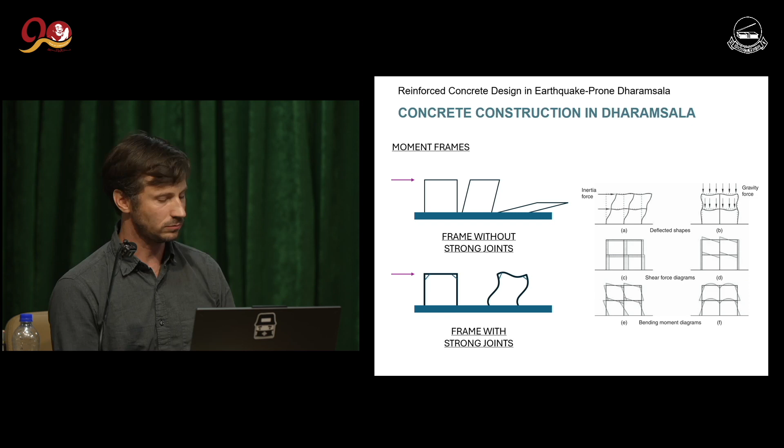So on the way here, we took this picture. This is a building under construction. You see here an elevation with a moment frame. We've got three floors. The force would come at each floor from the earthquake load — that's the inertia and the weight of the floor itself.

And that gets carried through the columns in bending to the ground. At the base, we would have lateral forces from each column, and then we would have an overturning effect at each base.

So that's the vernacular. How do we prevent buildings from falling down? And how do we try to improve the quality of our built environment so that things are safer?

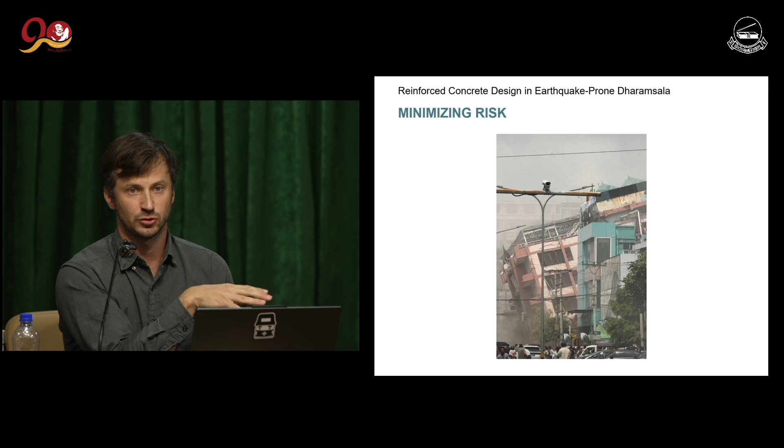So minimizing the risk can come from lots of angles, and I think we saw a little bit of that in the previous presentation. Some of it is much harder to control. Soil, faulting, like these things, basically no matter what we do, it's a bit of bad luck, right? If there is a fault happening in the middle of your house, it doesn't really matter how strong your house is, you're going to probably have a bad time.

But flexure damage and shear damage are things that we can easily control.

And the concrete system is quite flexible. Moment frames are notoriously flexible, so that's a really good thing for earthquakes. And they also use less concrete than a concrete shear wall system, which is a lot more economical.

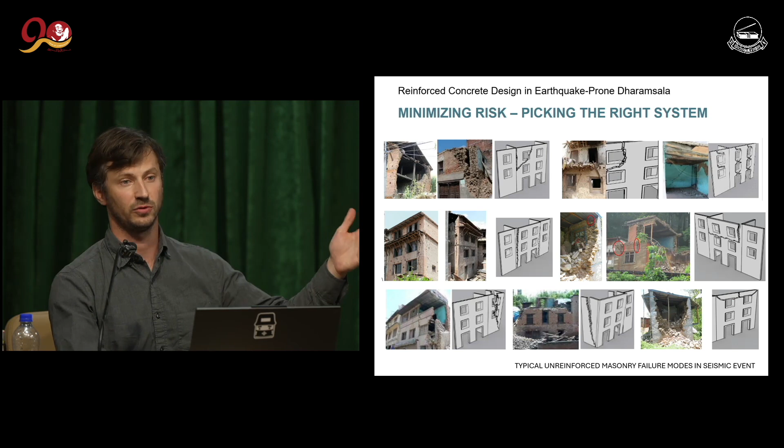I'm going to go a little bit faster over this because we had a brief introduction about that earlier. But planning is obviously a key first step to make things better. It's not just about construction accuracy. We can make buildings that are better by having them be simpler in plan, be more coherent in elevation, and more consistent as the lateral system goes. The code will really guide the design professionals to do a better job, and in some areas will restrict or prevent some of these systems from working.

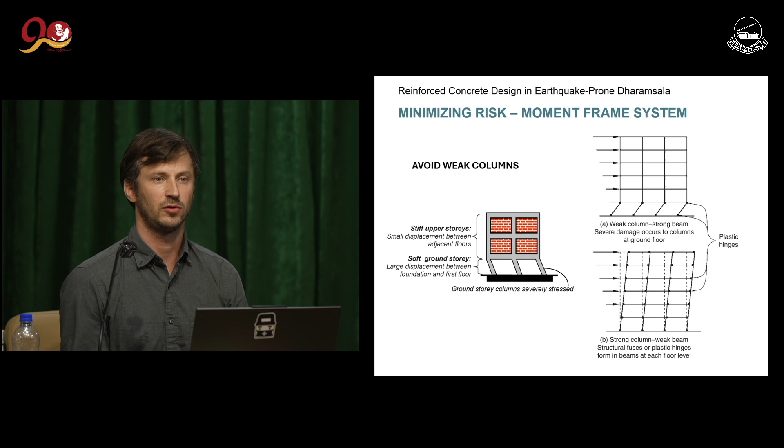So we saw how these columns are typically the weakest link, and I think that's maybe the biggest lesson to walk away from with this lecture. When the building is moving and we have a moment frame system, these columns tend to work the hardest, and there's more and more load as you go towards the ground, because that load adds as you go down. And so the columns at the base of your building are working the hardest. And that's the typical failure mode, where your columns fail.

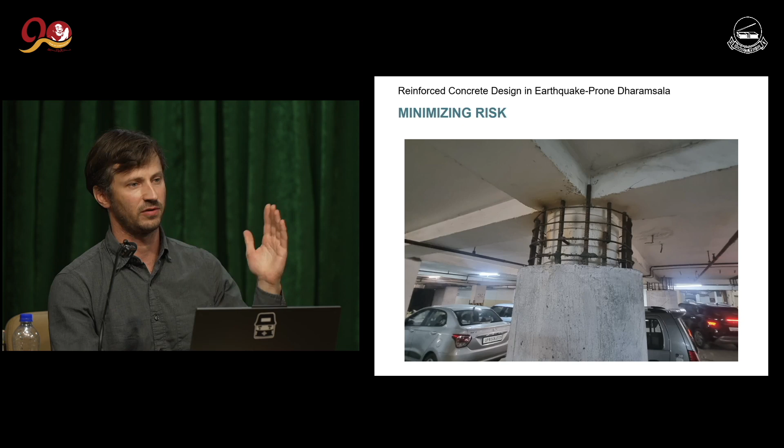Ultimately, when it comes to reinforced concrete, it's not a very glamorous exercise to make your structures safer. And it really comes down to very, very small, minute details, which may not look very important, but really make a difference. And it has a lot to do with rebar placement and having the right overlap between your bars, or the right amount of bars, or the right spacing between your bars. And there's a lot of rules as to how one should do that.

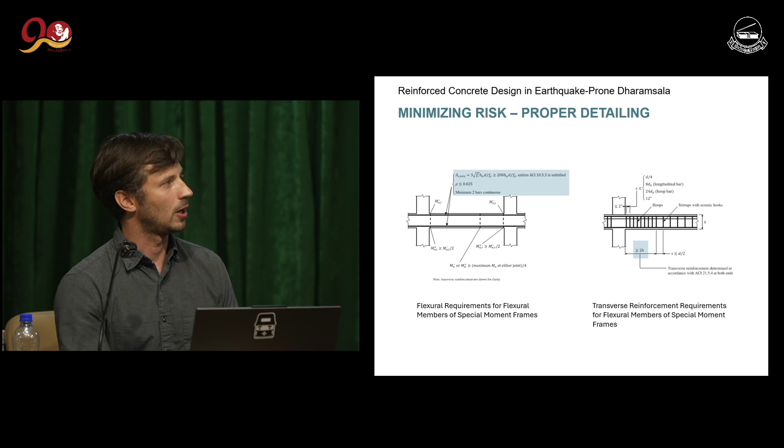I'm probably not going to go too deep into this, but here you see some diagrams that illustrate what appropriate reinforcement strategies would be for beams. We would want stirrups, which are shear reinforcement, to be much more tight towards the columns. It's a lot about this joint between the column and the beam. And then similarly, we want our columns to be very strong with tighter stirrups towards the joints. We want bars to be anchored properly, and that's also especially difficult to achieve at boundary conditions where your beams are not continuous.

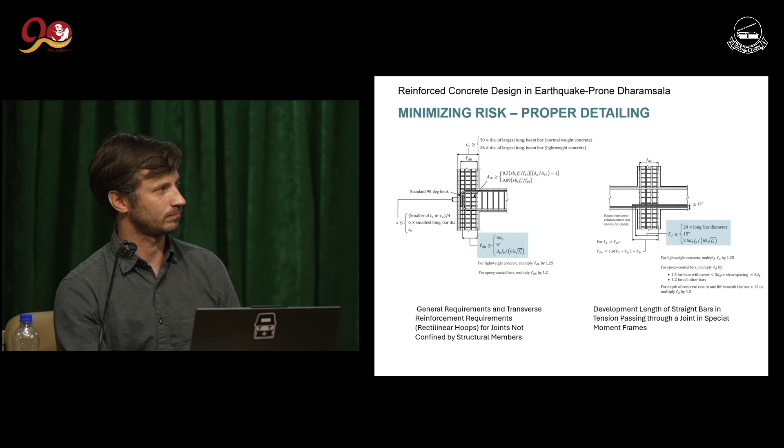At the foundation, this could also be an issue where your columns could come out of the ground or punch through your footings. And so similarly here, the code will guide you and recommend the right amount of reinforcement and the right details. And this is a really challenging aspect of the job, is to convince contractors who've been working for many, many years and have done things the way they've done them for a long time, that this could be valuable when for them it represents an extra cost and is not always an immediate benefit that's visible to them.

On site, we can have other issues with concrete, just the quality of the materials. We talked about contractors not using enough cement in their concrete mixes. Pouring concrete can be really difficult or really messy, so you could have voids in your concrete if you don't vibrate properly. There's a number of issues that could happen.

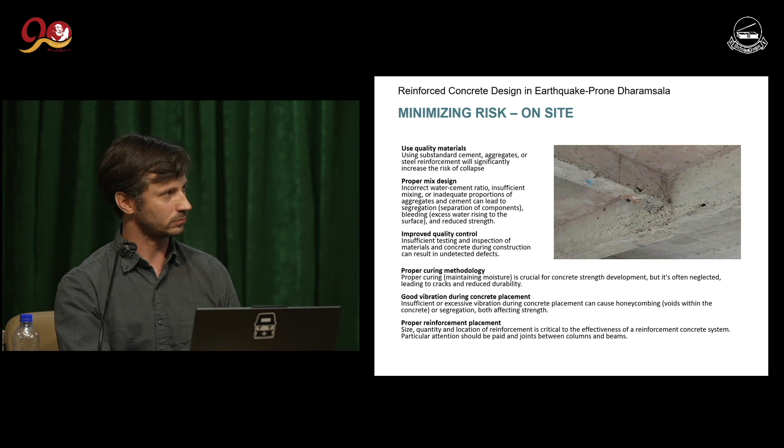Curing, which is like baking your cake, is obviously a very important aspect of the process. If you bake your cake too much, it's not going to be very good. The same thing happens with curing. If it cures too fast, your concrete will crack and will not perform very well. So all of these things are aspects that can be trained with contractors.

The last thing I'll talk about before we open it for questions is the balance between design criteria, which is an objective of how we want our buildings to perform, and how much resources we have in time and money. That's always the heart of the problem.

The code will have very specific guidelines for what a hospital should do. We want hospitals to be fully functioning after an earthquake, because those are areas where we're going to have a lot of needs for resources. People will want to go there. But for houses or most buildings, this is not necessarily required.

That's a fine balance to find between spending a lot of money to make a building resilient, and making a building that's just good enough for you to be safe when an earthquake happens, which could be a lot cheaper. So that's a tough thing to argue and a tough thing to really calibrate properly. Ultimately we all want to be safe, but none of us really want to spend too much money to retrofit our homes.